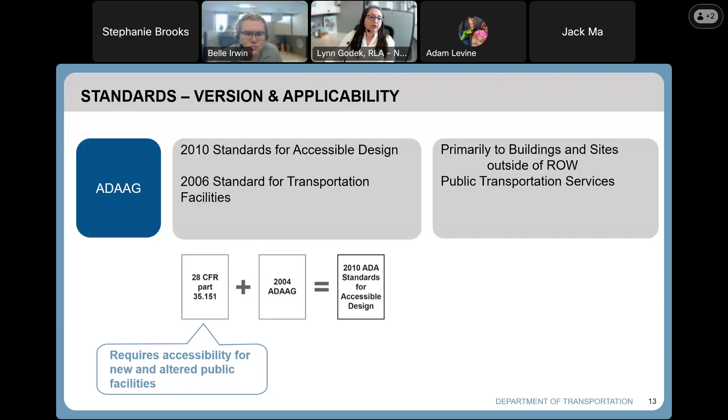Next, we have the 2006 standards for transportation facilities, which are specifically applicable to public transportation services. And lastly, we have the 1991 accessibility guidelines. These are the predecessor and outdated guidelines, which have been superseded by the 2010 standards, unless we are working on a New York State DOT project that is considered a 1R project, such as a resurfacing project. And when that kind of project affects an existing curb ramp, we will rely on the 1991 guidance for determining if those existing curb ramps will be left in place or brought up to current ADA compliance.

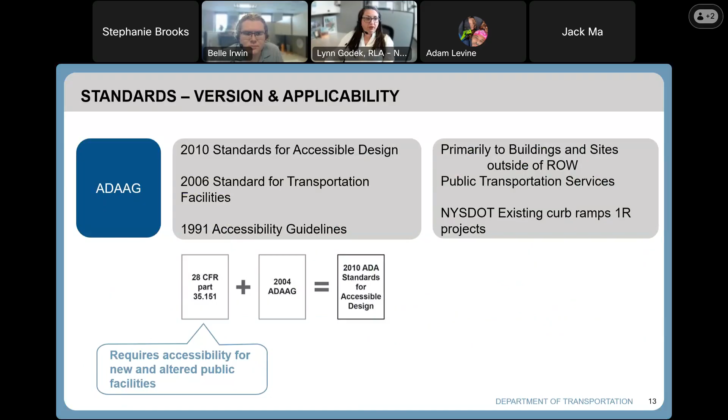Next is the PROWAG, which was issued in 2023 as a final rule by the Access Board. This is applicable and enforceable for transit stop projects only as an enforceable regulation. And that is because the U.S. Department of Transportation is delegated jurisdiction to adopt standards for regulation for those types of projects only.

The Public Right-of-Way Accessibility Guidelines are, in general, applicable to the public right-of-way. However, they are not adopted by the U.S. Department of Justice at this time, and therefore they are not enforceable regulations. They may, however, be incorporated by state and local government agencies and jurisdictions and others for enforcement of accessibility standards.

Next, I'd like to go over a brief history of the status of the PROWAG rulemaking and how we've come to the point where we are today. In 2011, a draft of these guidelines was published, and they have been available since then for use by state and local agencies. In 2013, they were amended to also include requirements for shared use paths. And in 2015, the New York State DOT issued an engineering directive to update our internal procedures for ADA compliance.

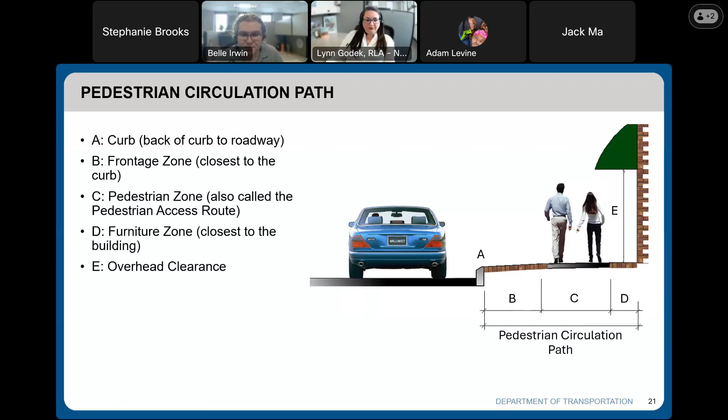So the pedestrian access route, an important part of that is continuous clear width. So 3 feet is needed for one wheelchair user to navigate. 3.5 feet is needed for a person using crutches. 5 feet is needed to turn a wheelchair, and 5 feet is needed for one wheelchair user and a walking companion, or 6 feet needed for 2 wheelchair users.

These are the basis for so many of our requirements, thinking about what is needed in a pedestrian environment. The pedestrian access route should be wide enough to accommodate users safely. Design standards and regulations are based on this understanding.

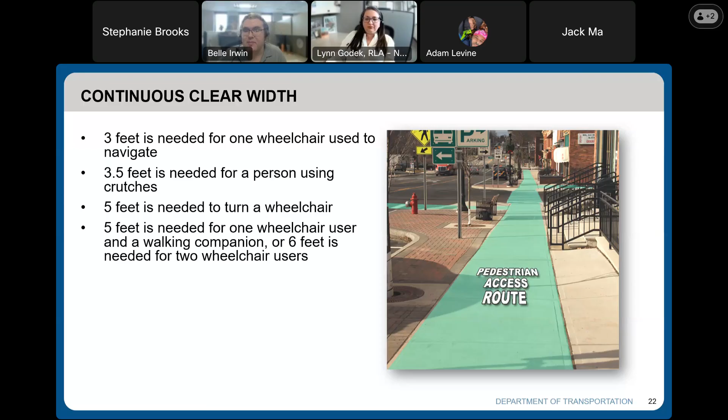Cross slope as well. So same thing with cross slope. It's important to understand that a cross slope that is too steep will result in a pedestrian access route that is not navigable by everyone. In an ideal world, all surfaces would be perfectly level. However, outside in the pedestrian environment, we have to contend with existing elevation changes, entrances to buildings, curb heights that are too tall, parking and drainage concerns. Lots of competing priorities exist in the pedestrian environment.

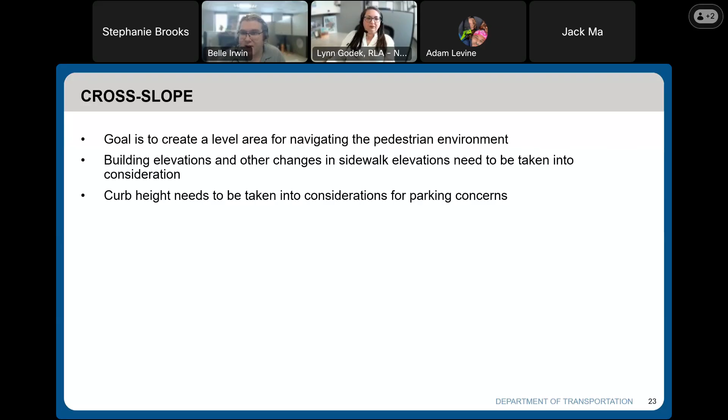Grade and running slope. So similarly, the running slope can create barriers if not designed and constructed with all users in mind. Sidewalks can follow the roadway grade generally, but we need to be careful in considering how sidewalks intersect with driveways so as to not create driveway coasters where the slope goes up and down and jostles the user. And we also need to think about intersections generally. We want to avoid bumps in grade when sidewalks interact.

And a curb ramp could be thought of to be broken down into these parts. So design standards have a lot of key considerations with these elements. So the terminology for a compliant ramp, the elements are and when they're needed. So there's the turning space, also called the landing, the clear space, the clear area. So these are areas and spaces for orienting. Grade breaks, the detectable warning surface, which we'll discuss in just a moment, and the side flares.

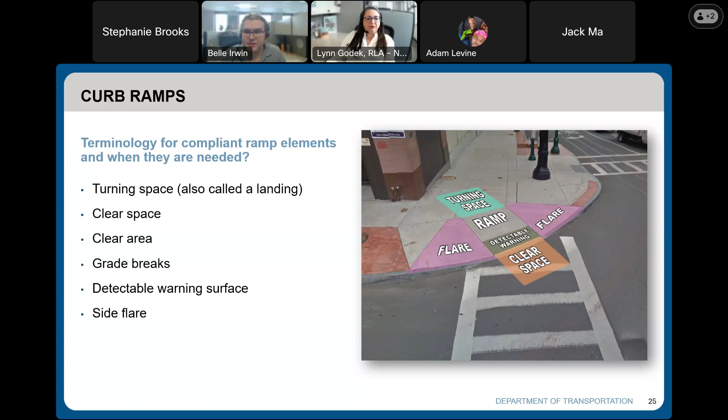So I just dropped that term detectable warning surface, or DWS. So what is a detectable warning surface? So these are raised truncated domes in a rectangular unit. You place them across the bottom of the curb ramp, and they aid those who may be visually impaired to identify the end of the ramp. Detecting a detectable warning surface means pause before proceeding.

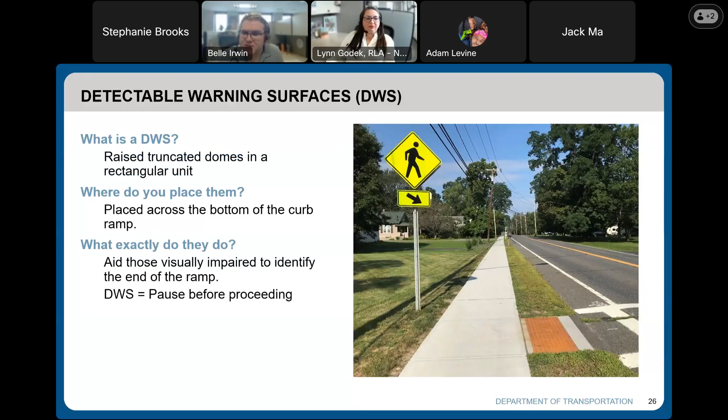And it's important to make sure that the detectable warning surfaces span the entire width of the ramp. So you don't want individuals who are looking to detect the detectable warning surface to miss it. So it needs to make sure that it's spanning that whole width.

And I will pass it back on to Lynn. Thank you so much. Thank you, Belle.

So once we have left the curb ramp as a pedestrian, we now enter the roadway. And for accessibility, it's really important to consider the length, the crossing distance, and the timing for these pedestrian crossings. Lengthy crossing distances are difficult for pedestrians, especially those for persons with mobility limitations, such as those using walkers, canes, and so on. Recognizing this, it's important to minimize the crossing distance as much as possible.

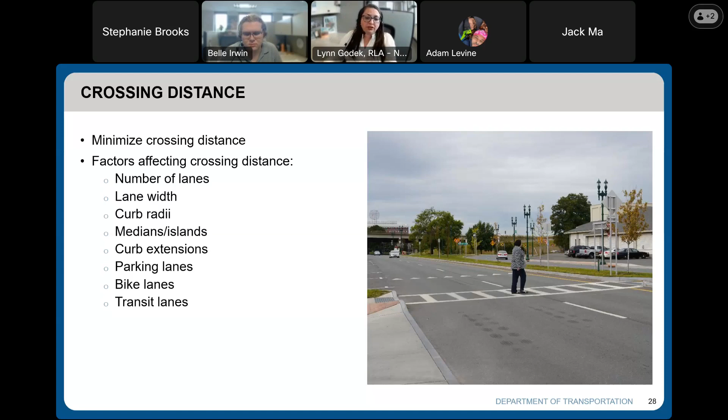There are many factors that affect our crossing distance, some helping to shorten the distance, others helping to lengthen the distance. Some of these factors include the number of travel lanes, how wide the lane widths are, what the curb radius is, whether we are adding medians or pedestrian refuge islands, adding curb extensions, also called bulb outs, or, trying to remember what the other term for that was. So also parking lanes can add to the width. And then there's also bike lanes and transit lanes. These are all important factors in considering the appropriate length of a crossing. Crossing timing is also another consideration, and we want to consider the needs of our slowest and vulnerable users.

Next, let's talk a little bit about accessible pedestrian signals. In order to ensure that pedestrian signal communications are inclusive of persons with visual impairments, it's important to provide pedestrian signals that are usable in various formats, both audible and vibrotactile. Research shows that pedestrians in general will move and cross together and faster when there is an audible signal present, and this will help to reduce vehicle delay when they are moving together.

The location of accessible pedestrian signals should take into consideration many key elements to ensure that they're usable by all. These elements include color contrast, alignment that is parallel toward the direction of travel so that it is intuitive which button to press for your crossing. Having a raised tactile arrow that is also vibrotactile, giving a feedback response that the button has been activated and is now available for use and responsive. Also, having a rapid tick locator can help persons with vision impairments to hear and navigate toward the accessible pedestrian signal.

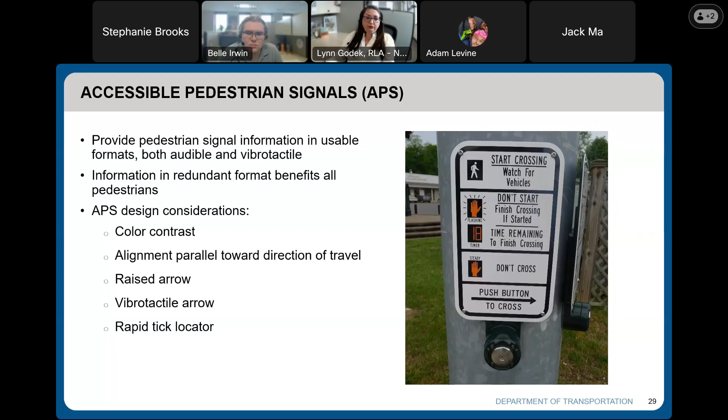There are several maintenance considerations that must be put into place when we are ensuring that our facilities are ADA compliant. Our job is not done once construction is over. When we own these facilities, we must also take care to maintain them or oversee that they are being maintained.

Some sidewalk maintenance problems that can pose a barrier include buckled and cracked sidewalks, depressed sidewalk segments that can begin to create a vertical barrier; even a 1/4 inch or a 1/2 inch can become a barrier. Overgrown vegetation, snow and ice accumulation, pavers that are heaved or damaged, drainage issues, tree roots can cause damage to sidewalk. Plows can cause damage to detectable warning surfaces, or we could have unresponsive pedestrian signals.

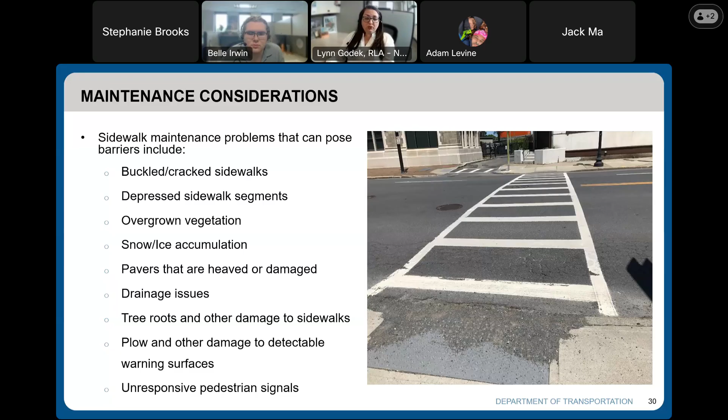Also, during construction and maintenance, the public right-of-way can be particularly hazardous to pedestrians with visual or mobility impairments. Using caution tape and traffic cones alone are not acceptable. We need to maintain features of facilities in order to provide ready access to individuals with disabilities and provide alternate pedestrian access routes to the extent practical when an existing pedestrian access route is blocked by construction, alteration, maintenance, or other temporary conditions. We need to make sure that the temporary route is detectable and includes accessibility features, including curb ramps where necessary.

As I said, cones and construction tape are not adequate to warn pedestrians with visual disabilities of the route closure and the path guidance to temporary routes. Rather, a continuous detectable edge must be provided throughout the length of the project. The MUTCD provides examples that can help, as well as the New York State DOT standard sheets.

When we are designing an alternate pedestrian access route, an existing pedestrian circulation path or alternate pedestrian access routes are required when the existing facilities are affected. And those alternate pedestrian access routes need to include sidewalks, shared use paths, crosswalks, pedestrian signals, access to transit stops and shelters. Each of the elements that were previously existing along that pedestrian access route must also be provided during construction for the temporary alternate route. And locating those temporary facilities on the same side as the existing is preferred.

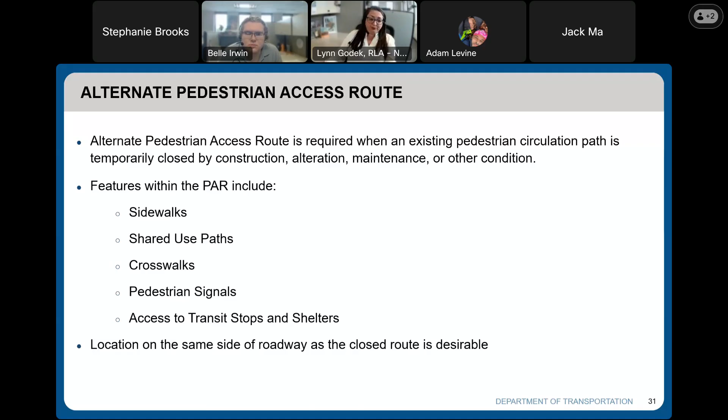Construction and maintenance activities can have a significant impact to the accessibility of pedestrian routes. But there are many ways that we can minimize and avoid those impacts for pedestrians. By phasing construction and utilizing detailed plans, we can consider using a multi-phase project and build sidewalks early on in the project. We can build sidewalks that are wide enough on bridges to accommodate temporary pedestrian and bicycle traffic where needed. We can work on one side of the street at a time, and so on.

Implementing detailed plans for the maintenance and protection of traffic, including pedestrian detours, is critical when the pedestrian route is affected. Signs should be placed in advance at the beginning of the block at accessible crossing points. We need to consider visual impairments and effective communications. It's also critical to not place signs within the pedestrian access route or bike lane. Temporary barricades need to be detectable by white cane, not just cones and tape, as we've said previously. We can also take advantage of public information and public announcements to provide the public with information about when a route will be affected and where the alternate routes are located.

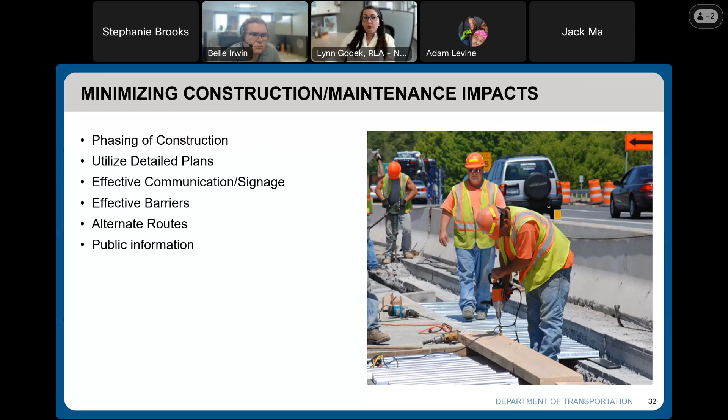Lastly, we would like to share a couple of other key requirements that can help to improve accessibility. The first one is ADA transition plans. This is a federal requirement for all state and local governments with 50 or more employees. They'll need to perform a self-evaluation of their current facilities, services, policies, and practices that do not or may not meet ADA requirements. That public agency must develop a transition plan addressing those deficiencies. They also need to schedule when improvements will be made. This plan must also be updated periodically.

Locals that are developing transition plans need to reflect the processes utilized by state DOTs, MPOs, and transit agencies to develop the statewide transportation improvement program and metropolitan transportation improvement programs.

Next, our projects. Public agencies should work to meet accessibility requirements throughout the project delivery process. Issues surrounding pedestrian accessibility should be addressed at the earliest stage possible to reduce or prevent conflicts with other right-of-way, planning, environmental, and design considerations. This could include acquiring right-of-way and the use of special plan details for specific locations to remove barriers. Projects requiring pedestrian accessibility include not just new construction, but also alterations to the existing facilities.